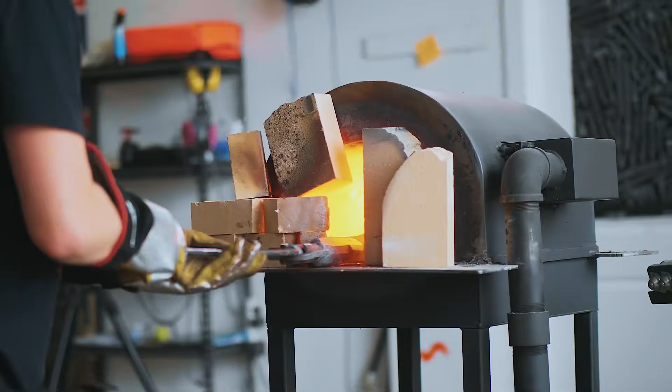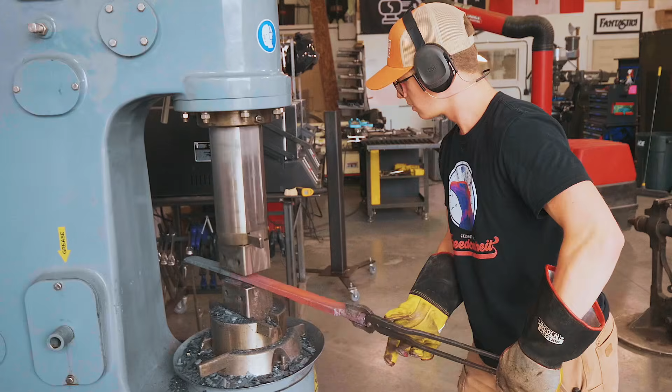By now, you know the drill. We heat it up, we smash it together, we then let it cool down before grinding it to clean it, cutting it all up, stacking it up again. Nothing quite like making Damascus.

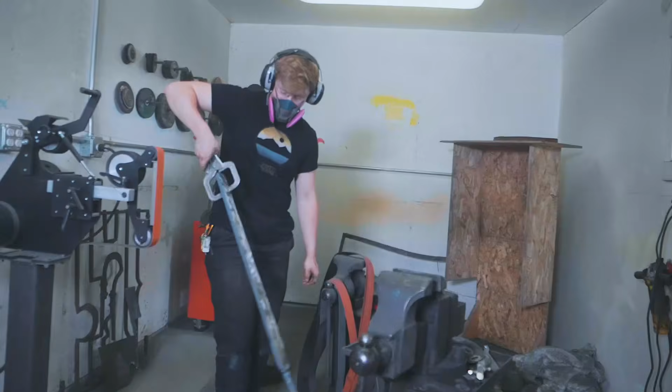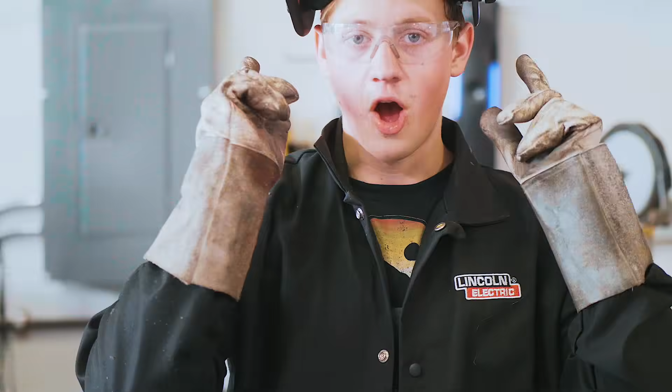Okay, we've got 8 pieces chopped off of that bar that Alec forged out. Each of the pieces is 3 1/4 inches long. I'm gonna go ahead and tack them all up, weld the handle on there. We're gonna go ahead and re-weld it. We got that pattern lined up so that it kind of snakes back and forth throughout the whole stack, so it'll look really, really nice when we're ready for our next stack and weld.

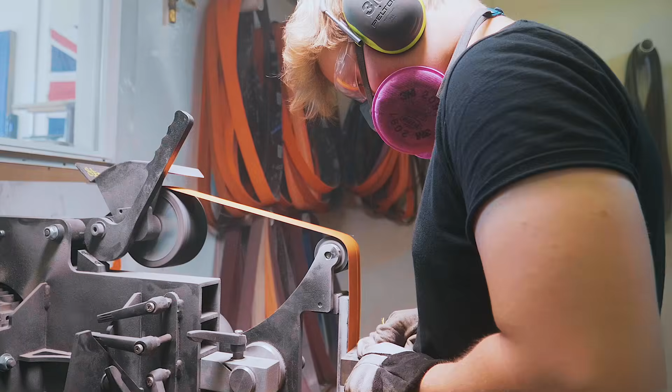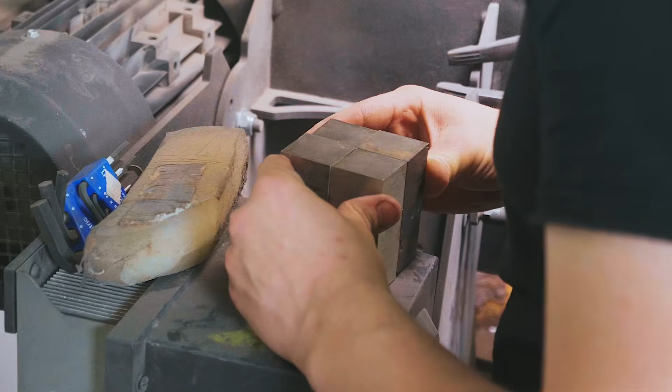All right, we've got our 4 pieces mirrored so that there's an explosion coming out of the center. I'm gonna go ahead, re-tack them all together, put them in the forge, weld them together, redraw it down to a square, re-4-way that, and that'll be what we tile out into our blade stock.

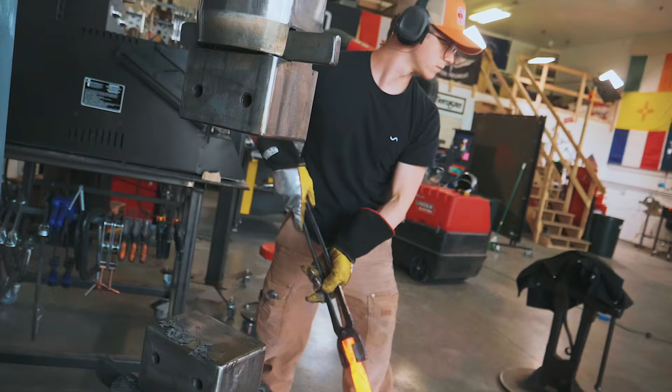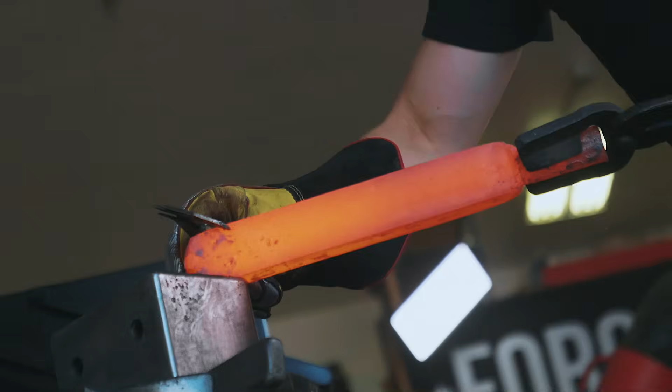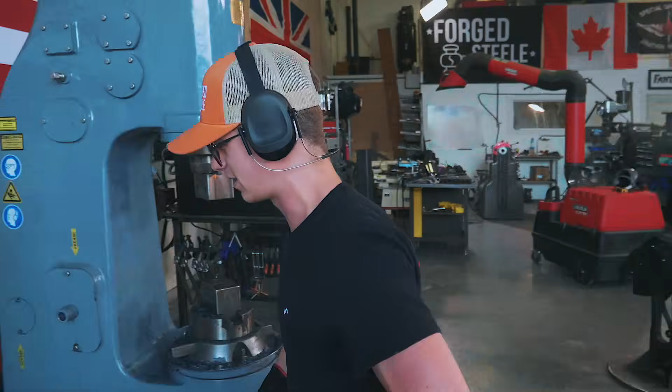This is a glorious piece of steel. Well done, Will, taking the helm on making this Damascus. This is gonna be some amazing stuff. This is gonna be a beautiful piece of steel. That's the challenge, you know, on a sword breaker, half the blade is missing. Yeah. So, for patterns, that can be a little bit of a trick. It's gonna be tight, tight, tight.

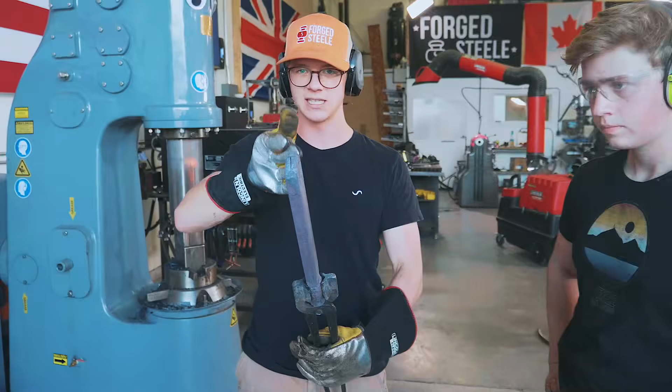Right now, as you know, we have the pattern flowing with the end grain. The next step after hopping onto the milling machine is gonna be chopping it up at an angle, flipping it all, and welding it together so that the end grain, the grain that is running this way, is running this way on the actual blade. People call this tiling pieces of mosaic. It's a cool technique. You can let this cool down.

Now we're gonna talk a little bit about design. So the sword breaker. Sorry to burst everyone's bubble. A sword breaker is not actually designed to break a sword. What the sword breaker is designed to do is break the opponent's attack upon you. So I think we'll do a little bit of demonstration here.

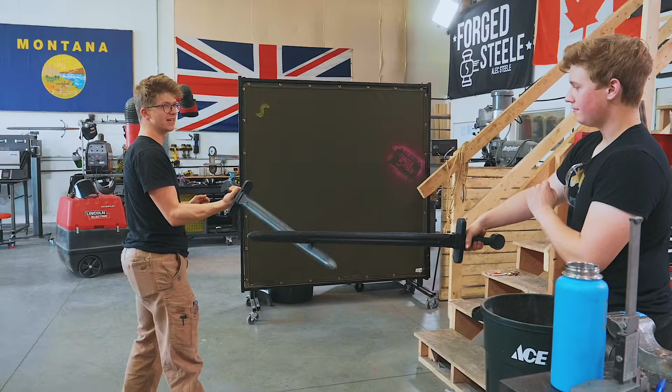Will and I are fighting to the death in a... Where are we for this fight to the death? We are in a Florentine battle to the death. Gentlemen with their rapiers attacking each other. Will comes across my left side with a great stabbing blow. But what do I have? A sword breaker. And as his stab comes across, my sword breaker captures the blade, pushes it to the side as I thrust the sword through my opponent. He falls to the ground.

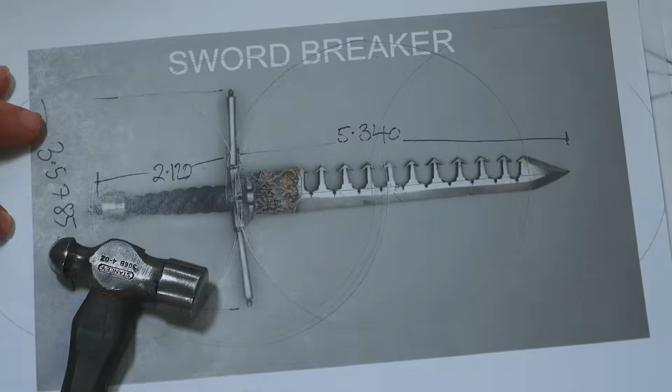This is a gorgeous example of a sword breaker. This photo is from the Wallace Collection, my favorite museum of all time. And this thing is just gorgeous. And one of our favorite things about this are the details in that sword capturing element of the blade. We have been working on creating a scale drawing of the sword breaker. Part of the things that are important on this design are these little sword capturing elements.

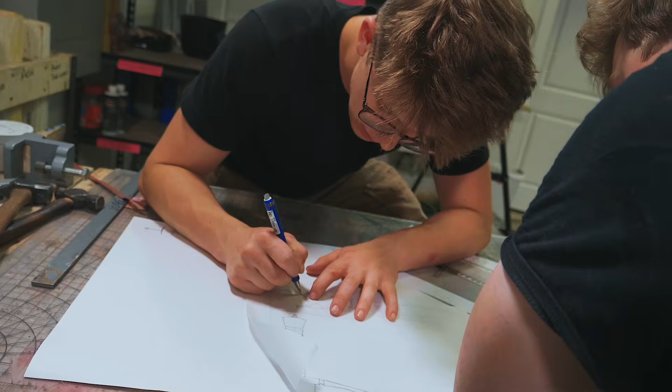And that's what we're gonna be doing a little bit of work on now while our piece of steel cools down. So what excites me is maybe taking some architectural shapes of the time. So I'm thinking we maybe have a look at some kind of Renaissance era architecture. Will has some photos on his phone from a museum in London of a sword breaker. This one has spring-loaded teeth. So I was at the Wallace Collection a couple of months ago when I was back in the UK. We can see a whole load of detail here.

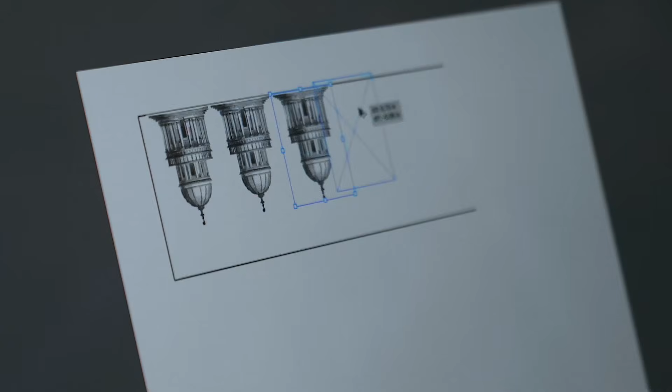What if we did a shape that mimicked the shape of the Duomo? Ooh, I like that. That's really quite nice. I have an idea. We just put upside down buildings along the blade. Look how good this looks. So we could theoretically do something like that. I don't like it so much. These are a little too bulky.

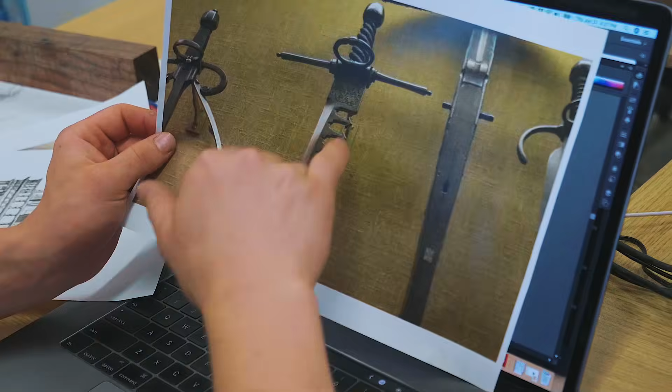That's kind of interesting. I took the photo of the sword breaker that we're actually basing a lot of this off of, put it in Illustrator, traced around it. That then looks like this, which is very nice also. So we've got lots of options. Our piece of steel in the meantime.

I gotta sneeze. I have to sneeze too.

Whew, teamwork. So Will is now gonna jump onto the milling machine, start cleaning up this piece and getting it ready for the next weld, while I keep cracking on the computer, digitizing the design of this sword breaker.

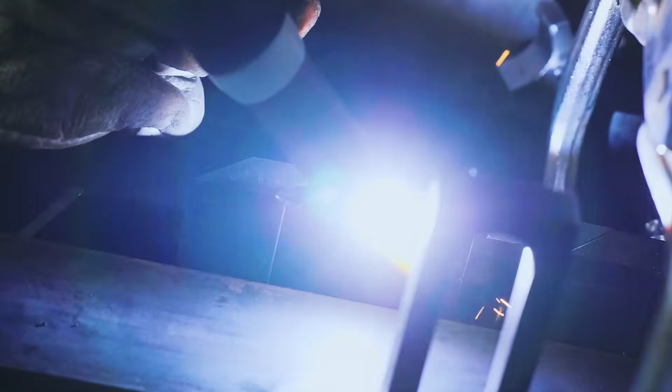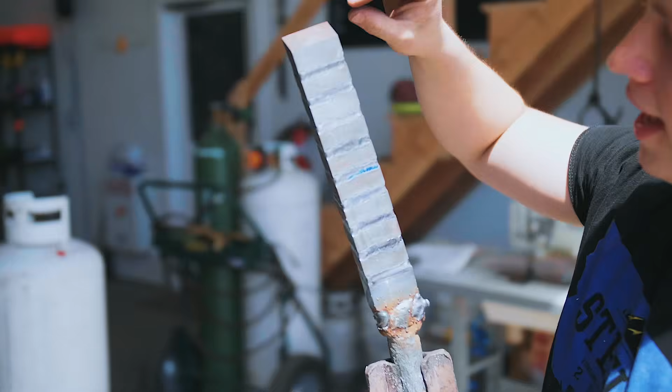All right, we've got our billet welded together, TIG welded around all of the seams. There's no way for any air to get in there, so they should weld up just perfectly. And as you can see, it's at kind of a weird angle. The reason that we've done that is that now we have our pattern that used to be on the end grain running down like that. So the pattern will be repeating down the whole blade.

We've got some parent stock on here with the world's most prettiest looking welds, because I had to fill in a huge portion because I've used the same handle for every single weld on this billet, which is something I don't think I've ever done before. Just kind of funny, just a little joke. It's not actually a joke, it's just kind of dumb actually. But I did it anyway, and it should work. So now we need to go ahead, throw this bad boy in the fire, stick it together, and forge ourselves a little sword breaker blade.

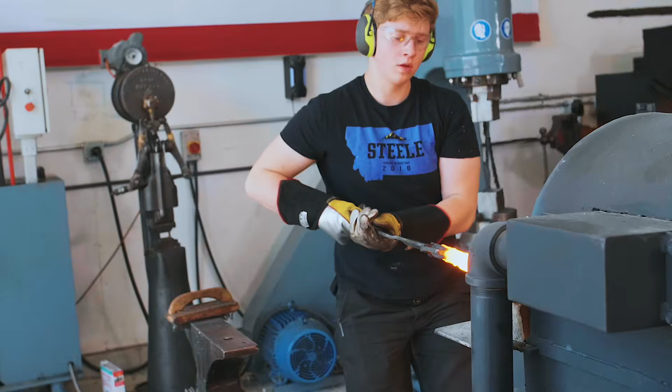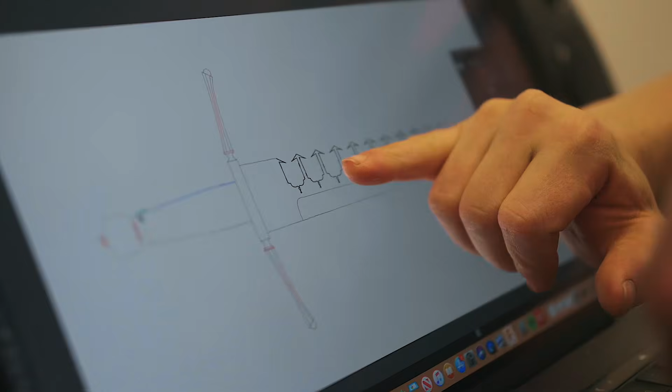Okie dokie, I've made some progress on this. Got a little bit of a cool sword breaker design. Lots of sharp teeth, cool facets and details on the guard. So one of the other things that I noticed is that on all the historical examples, the bevel comes right up to where. Okay, so you think come even higher, or do we pull this down? I think we pull those down. I think we do with slightly widening out the very top of that, just a tiny bit. Yeah. Cool.

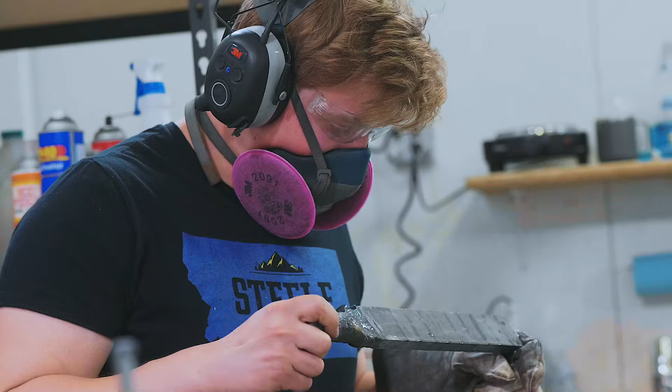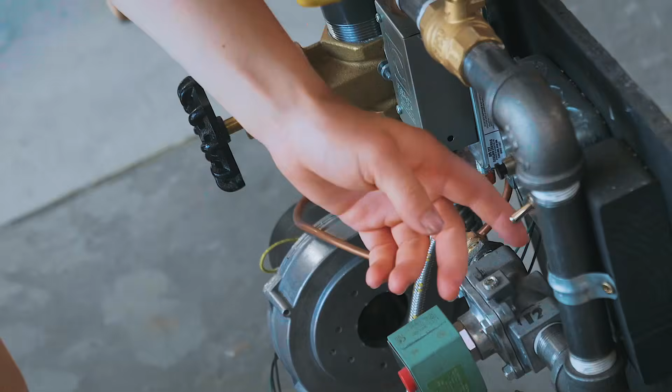So while Will finishes up the grinding, I'm gonna light the forge so it's ready for us to forge out that blade, and then it's back to the design to write down the measurements of everything, the interior dimensions of the tang, and what the hole needs to look like in the handle, all of that, as well as the dimensions of the blade that we need to reach.

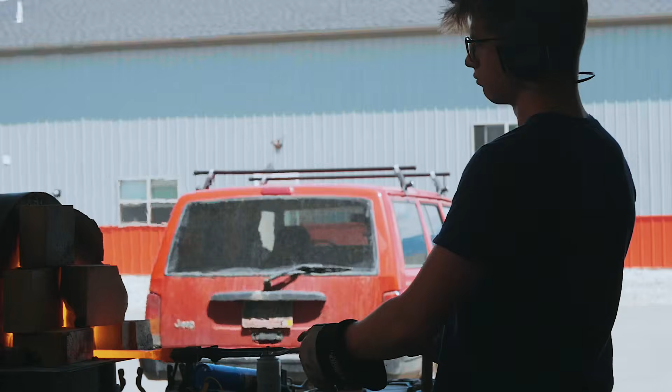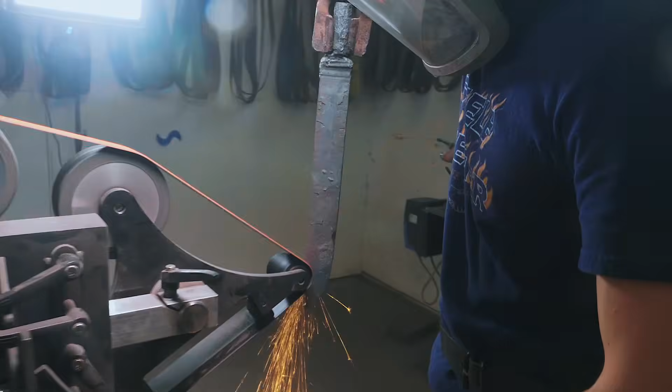That doesn't look very good at all. It doesn't look like it welded right there. We have another issue right up here, sadly. I'm gonna see if I can grind down through it to save forging them in any deeper. I think we got through it. A few little moments of grinding, and I hope we don't discover any more of those things once we're done forging.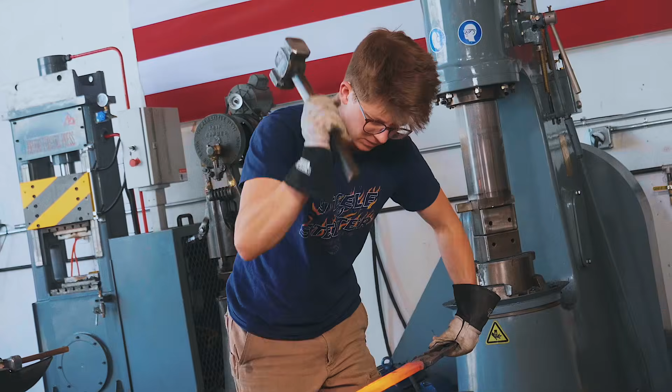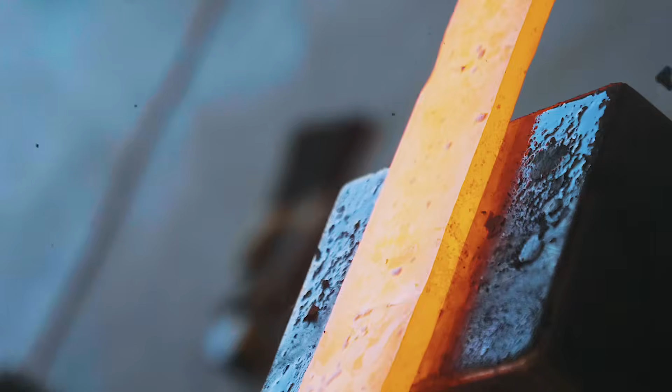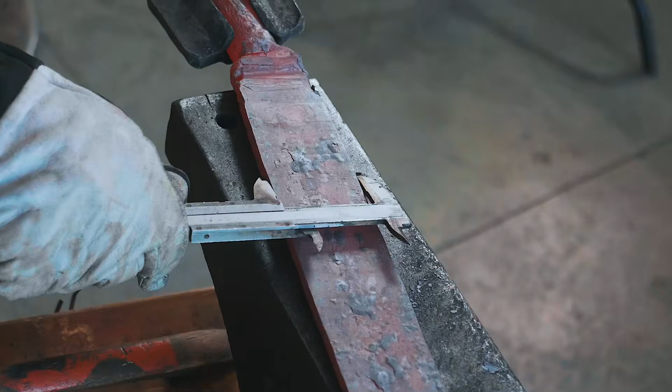We're a little narrow on the width. Okay, so I'm gonna have to thin the piece down because we're about 100 thousandths of an inch too narrow. So we're gonna lose some of the thickness to hopefully gain some width. There we go, now we've got the width. That's good. So now what I'm gonna do, cut off the handle, flip it around, and draw out the tang.

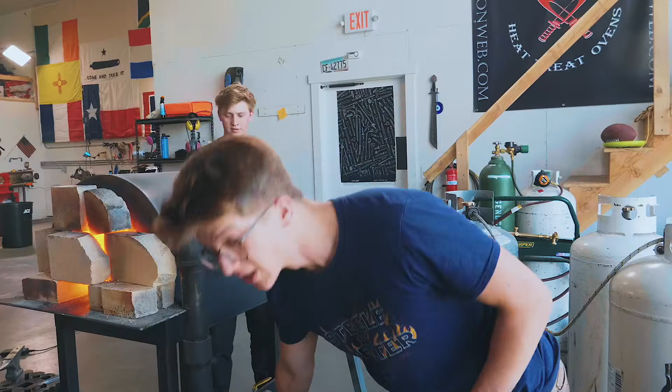Okay, there we go. That is a rough forged sword breaker. So with the blade forged, it is now time for us to do some heat treatment cycles. Now, we want to do all of our normalizing cycles before we do any grinding, because one, we want this thing to be nice and soft, but two, when we are done cutting and filing it, we want to be able to heat it up and go straight into the quench with as little oxidation as possible.

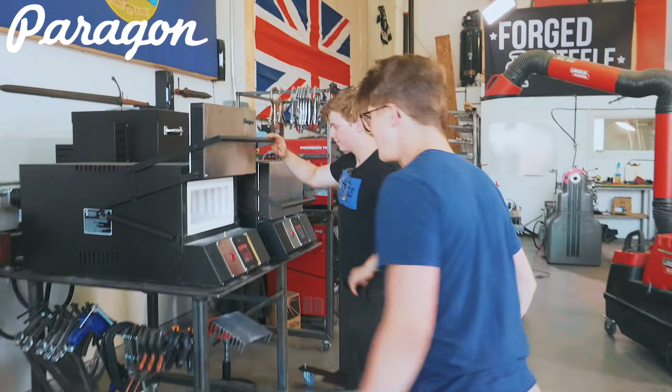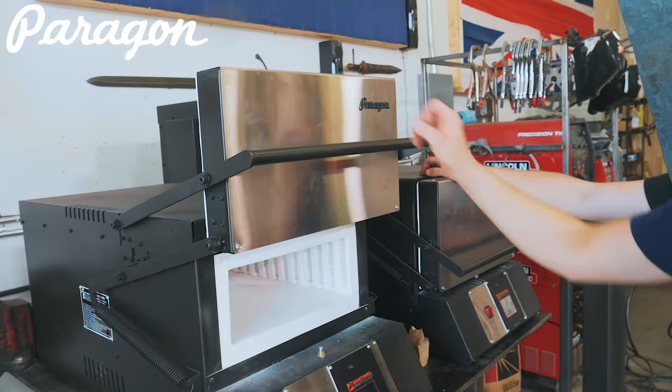So I'm gonna put my rack in, in goes the bit of steel.

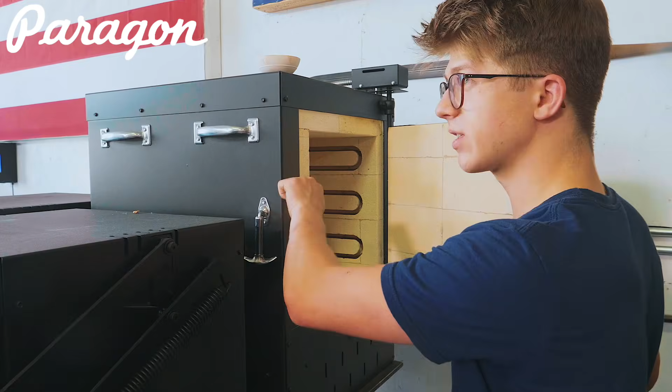So Will, you have just set it up for the firing. You want to run us through the schedule that you have for this? Sure thing. So what we're gonna go ahead and do is I've just programmed it in to go to 1900 degrees, which is pretty dang hot. Ramp back down to 800, back up to 1700, back down to 800, 1500, 800, 1300, 800, 1300, and then we're done. And so basically what we're doing is when we go up to 1900, we're going to get a normalized grain throughout the entire blade, so it's going to be a pretty big grain inside the steel.